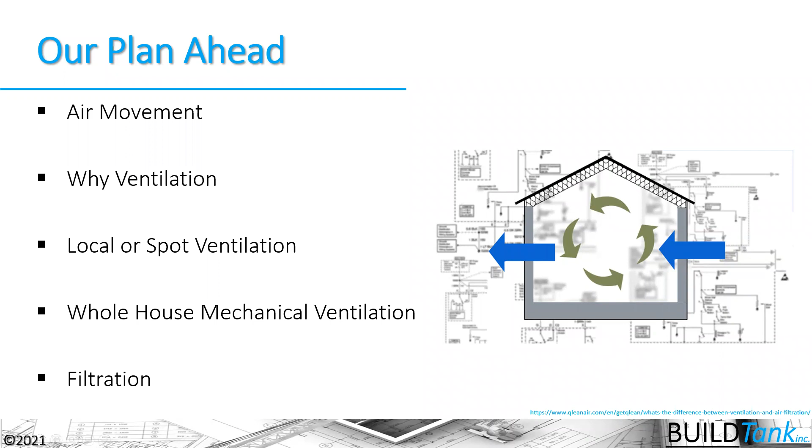So to begin, we have a poll question that we wanted to throw out there. It's a good question, a question that we get quite often in the field from builders, trade partners, code officials, owners of housing. All kinds of folks ask this question.

We'll get in a couple answers. I'll go ahead and stop it in 5 seconds. Okay.

Okay, so we still have some people out there, about 37% or so, that are saying yes, that we can build houses too tight. And we must have reached out to the 63% who are saying no, because the answer to the question really is no.

The reality is that we're asking the wrong question. What we're trying to do is get control of airflow in our houses. And in order to get control in our houses, we need to build our houses tight. We'll come back to that air control in a minute, but really in order to get that air control, we're building our houses tight. We need to think then, what is the real question that we're asking there? And that real question is, can our houses be underventilated? And the answer to that is a resounding yes.

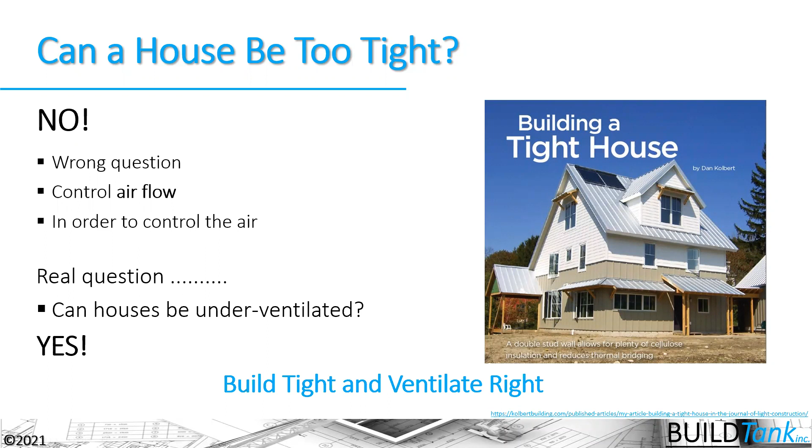Our houses can be underventilated. And in most cases, they are underventilated because we're not spending enough time on that question, on how do we ventilate our houses? How do we comply with what the code is asking us to do? And what the code is asking us to do now is to build our houses tight and to ventilate them correctly per the code.

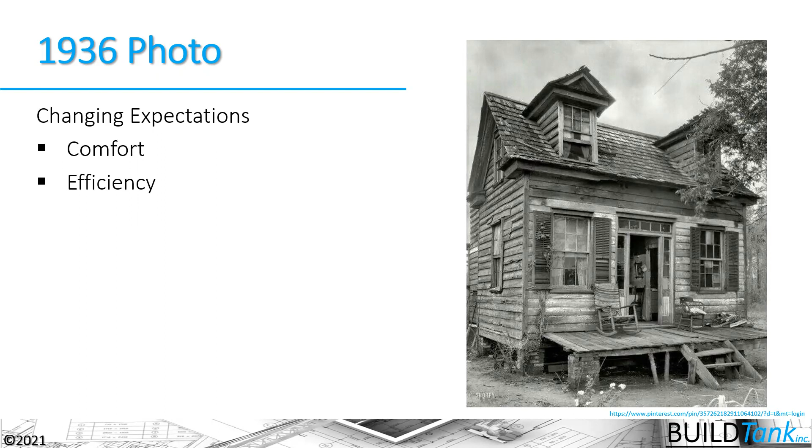So efficiency expectations have changed pretty dramatically, and we've added thermal insulation to our houses, which really only began in the late 1960s. We want our houses to be safe and healthy, and we want the indoor air quality to be good in those houses. We want our houses to be durable.

So all of these things are leading us to build our houses as tight as we possibly can and to ventilate them correctly. We need to build them tight to gain comfort, efficiency, and safety and long-term durability, and ventilate them correctly from a durability perspective, from a safety perspective, and health and indoor air quality perspective as well.

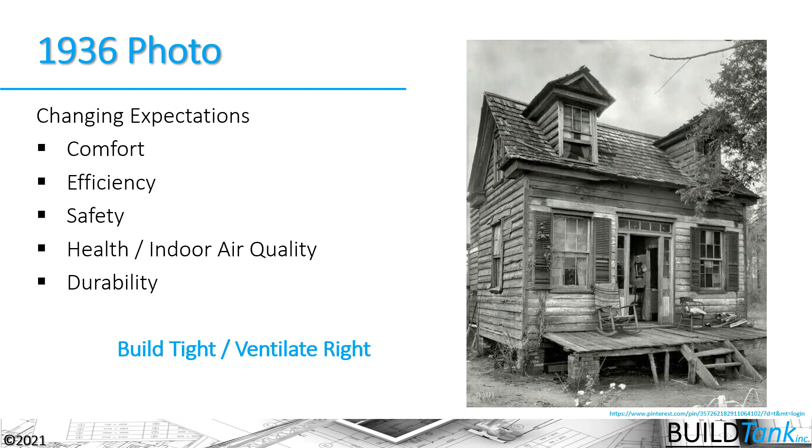As we gain control and predictability of the airflow, the moisture flow, and the thermal flow in those houses, we have houses that will meet those core expectations of our houses, and have houses that will last and be durable over time. But when we're talking about building tight and ventilating right, we're talking about primarily the airflow portion and also the moisture portion. So we need to do a quick review.

And if you were with us last week, this will be a very quick review. That's to talk about how air flows in our houses. We need to think about air as a transport mechanism. Air is transporting heat, moisture, and pollutants around our houses, just like this freight train is transporting coal.

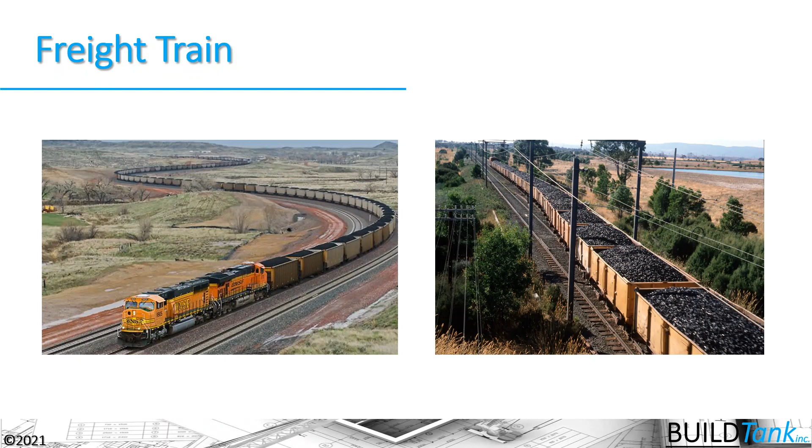Now we know that this freight train is taking coal from point A to point B, maybe from the mining pit to the coal plant or the power plant. And the issue with air is that we don't always know where it's going to take its load that it's transporting. Ideally, it's taking it from inside to outside our houses, or potentially from outside to inside our houses. But sometimes that load gets deposited inside of a wall assembly or a roof assembly, and that heat and moisture and pollutants can create repeated wetting and condensation in our buildings.

So from an airflow perspective, we know that any air that moves into our house needs to move out of our house. We define our houses by this thermal envelope, the alignment between the insulation and the air barrier system all the way around our house, that creates this boundary condition that separates conditioned space from unconditioned space. And so that boundary condition traps a specific volume of air.

And when a cubic foot of air enters our house, that means that a cubic foot of air has to leave our house, and vice versa. If a cubic foot of air leaves our house, then a cubic foot of air has to go into the house. And we can equate a cubic foot of air from a size perspective to try to imagine that it's about 4 basketballs equals about 1 cubic foot of air there. So a cubic foot of air enters and a cubic foot of air leaves.

We need to have a hole for that air to move through, and we need some type of pressure difference across that hole for that air to move.

From a ventilation perspective, we're getting air in and out of our houses to help maintain indoor air quality, but also to help maintain a proper moisture balance within our houses. Because as we build our houses tighter and gain that control and predictability, the moisture content of that air will naturally increase.

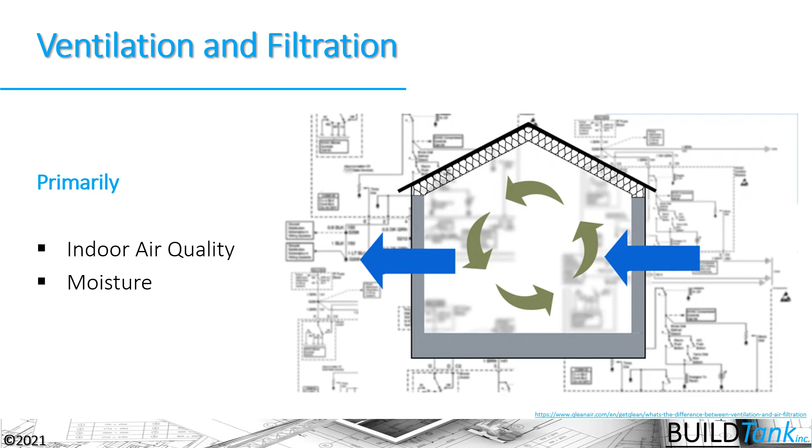We want to build tight again to create long-term durability, and it has to be married with that ventilation side. So that's why we get that mantra, build tight and ventilate right, because they're wedded together. They can't be separated.

From an indoor air quality perspective, ultimately, why is it an issue for us? Well, we know from this COVID era that we're currently living through, hopefully coming to an end from, that we spend a significant amount of time in our houses. Before COVID, we spent about 90% of our time indoors. During the COVID era, we're spending probably even more than that.

The Environmental Protection Agency is telling us that indoor air pollutants are 2 to 5 times greater indoors than outdoors. So we're trying to figure out how do we dilute those pollutants by bringing fresher air from outside into our houses and potentially filtering that air.

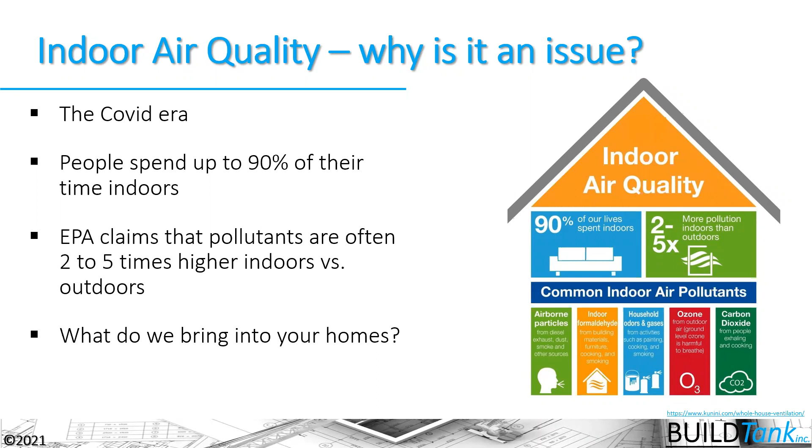We need to also think about what we bring into our homes, not only from an air perspective, but from the furniture, the cabinets, the cleaners that we bring into our house. These are things that off-gas, that create that new car smell, which actually is a sign of volatile organic compounds and other things that are not good for us.

Now, there's a doctor out there that tried to understand better how much time we actually spend indoors. He says our average lifespan is 79 years. Of that, 69 years we spend indoors, 54 years we spend at home, 26 years in bed, 4.3 years in our vehicles, and 6 years outside of that 79-year life.

So it's a significant amount of time to try to put it in perspective, how much time we actually spend indoors, breathing air that potentially isn't filtered, breathing air that's the transport mechanism for the pollutants that we might worry about from a health and safety perspective.

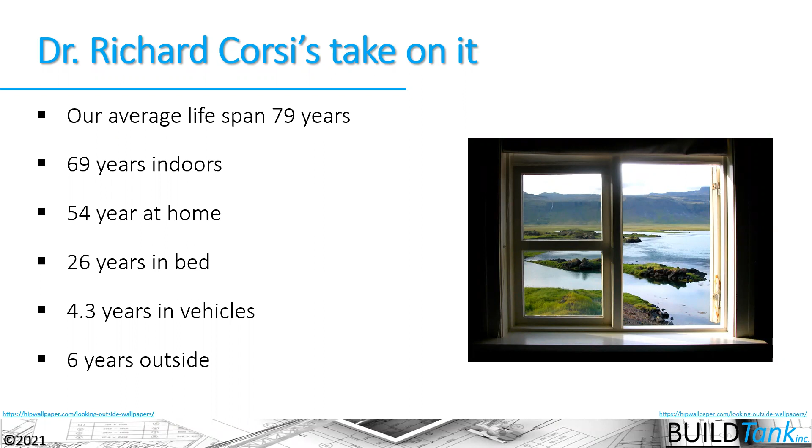Another way to think about why it matters is that air and the pollutants it carries can have some severe health effects for us. It can impact our emotions. It can have physical impacts, cognitive impacts, and can impact our respiratory breathing as well.

So this notion of filtration and ventilation is a real health and safety concern in our houses, because we need to build them tight to meet our efficiency goals and our long-term durability goals, and ultimately meet our comfort expectations and other expectations we have of our houses. But we also need to ensure that we take care of the health impacts of that.

So ultimately, what do we do? From this perspective, we need to think first about source control, bringing non-toxic materials and products into our houses. We need to think about radon and building a tight house, and how do we ensure that radon never enters our house, that we mitigate it before it enters by getting that proper radon system below the foundation, routing a pipe up to the peak of our roof, and using stack effect or passive radon ventilation to get it out, or potentially make it an active radon system with a fan as well.

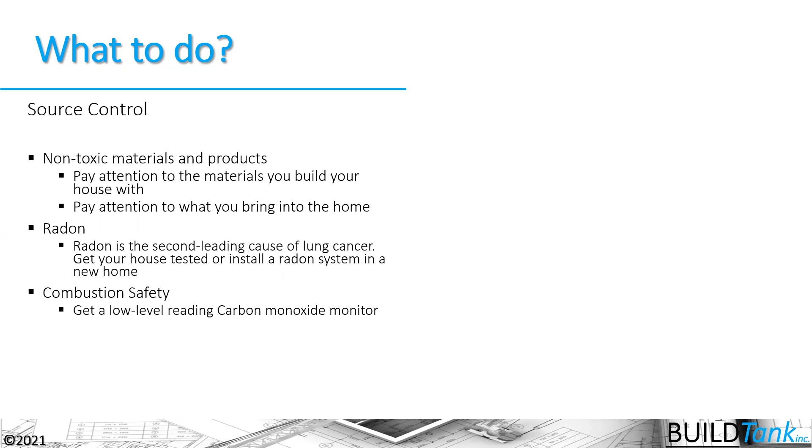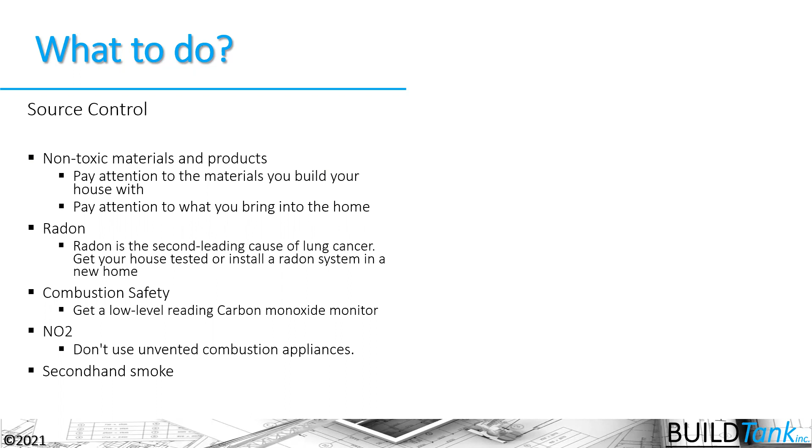Combustion safety is a huge issue because carbon monoxide is such a volatile gas that can ultimately kill us. We want to try to ensure that we're using as few atmospherically vented or non-sealed combustion appliances in our houses as possible. Nitrogen dioxide is another issue we need to think about, let alone smoking and other pollutants in our houses. So moisture control is another part of this.

Moisture destroys our houses. It can cause mold growth. It can cause things to get wet repeatedly from condensation.

That condensation ability is really the single thing that destroys houses over time - that repeated wetting of our structures, of our building assemblies. So moisture control is a big part of what ventilation is trying to do, is to maintain a moisture level in the houses that is adequate for the occupants, but won't ultimately destroy our houses over time.

Fresh air is a big thing we want to ensure. Controlled whole house mechanical ventilation is one way to introduce fresh air, and local and spot ventilation is one of those ways to ensure we can get the pollutants we put into that air up and out at the source at the time we're doing cooking, laundry, or our business in the bathrooms. We need to get that air up and out as soon as we can while doing those activities. That's what local and spot ventilation is all about.

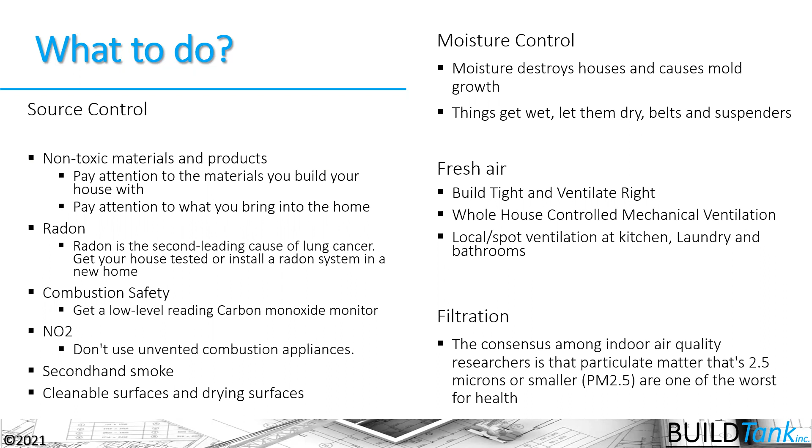Now we have this tremendous ability to filter air that's not only flowing within our houses, but flowing from outside to inside our houses to help ventilate it. We can get down to filtering very small particles, this PM2.5 size particle, out of the air. We can actually filter viruses out of the air as well now in our homes. So ventilation and filtration are super important, again, from this health and safety perspective.

Now, ventilation, again, we're trying to do it to help meet these modern expectations we have in our houses. When we're applying building science on our houses to gain control and predictability of heat flow, moisture flow, and air flow, we are coupling that with ventilation to help get that control. We're building tight to help get that control. We're ultimately trying to get fresh air for the occupants to increase the indoor air quality of our houses, and we're adding filtration to that. So ventilation refers to this exchange of indoor and outdoor air, and that's ultimately what building tight and ventilating right is all about.

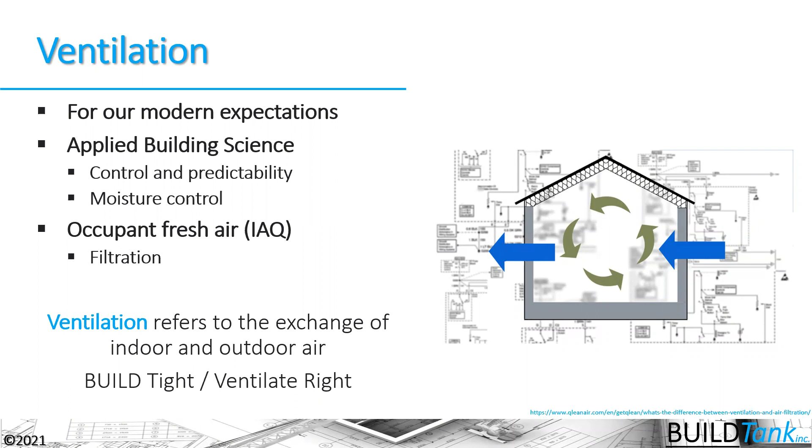Now, the next thing we need to talk about is moisture control and ensuring we have the proper moisture balance inside of our houses so we ultimately don't get mold growth. Now, mold is very common in our buildings - there's always some mold spore inside of our houses, and we need to understand what is needed for mold to grow.

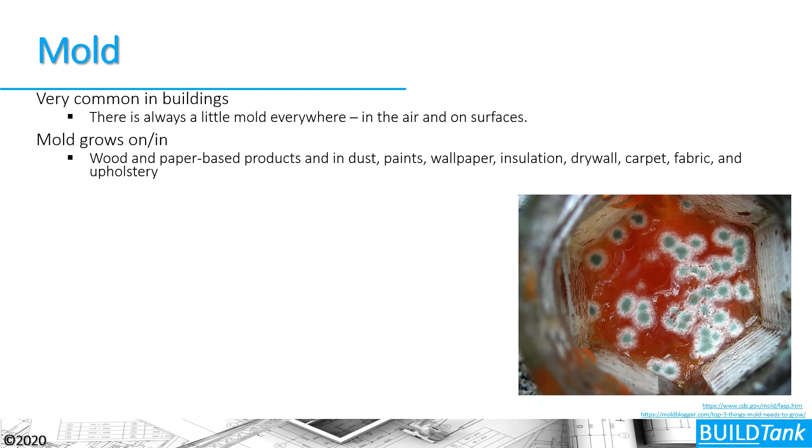One of the big things it needs is a food source, which is generally wood or paper-based products, dust, paint, wallpaper, insulation - all these things we build our houses for are means for mold to either feed on directly, or they trap other things in the air like dust and other pollutants that mold likes to eat. Mold ultimately needs a mold spore, the food or nutrients it feeds on, a specific moisture range for it to grow, and a temperature range - that's the 32 to 120 degree temperature range, and 60 to 90% relative humidity is ultimately what it needs.

So we can think about ways of controlling mold growth in our houses as well. If we can control the moisture content in that house, we can have better thermal control, air control, and we can promote drying potential over wetting potential. We can ensure that we're not going to get good mold growth in that house.

So we need to think a bit about where we're placing vapor retarders, how we're doing vapor control mapping in our assembly, so that we can ensure we have drying potential in at least one direction, if not both directions - which would be better yet - of these assemblies, because we know ultimately they're going to get wet. We need to let them dry.

Just going back to that 1936 house - why is that house so uncomfortable? Well, it has a lot of air moving through it, which means it has tremendous drying potential. And if we take a little care of it, it's going to last for a long time, meaning it's going to be durable. But when we layer on these other expectations onto that house, we change its drying potential dramatically. When we build it tighter so less energy is flowing through it, we're able to trap more energy to keep us warm in winter and cool in summer. We've changed the drying potential pretty dramatically in that house. So we need to think about those things when we build.

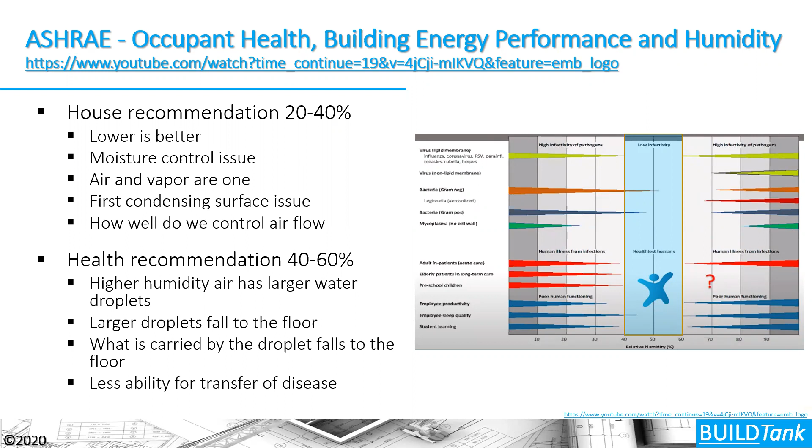Now, what's come up recently is this health recommendation that we have a 40 to 60% relative humidity, because the higher the humidity inside of our houses, the larger the water droplet, and the larger that water droplet is, ultimately it will be heavy and will migrate to the floor. So if that water droplet is in the air, and it's also carrying a virus, for example, then we have a means to get it out of the air. We have a healthier indoor air environment for us to breathe ultimately.

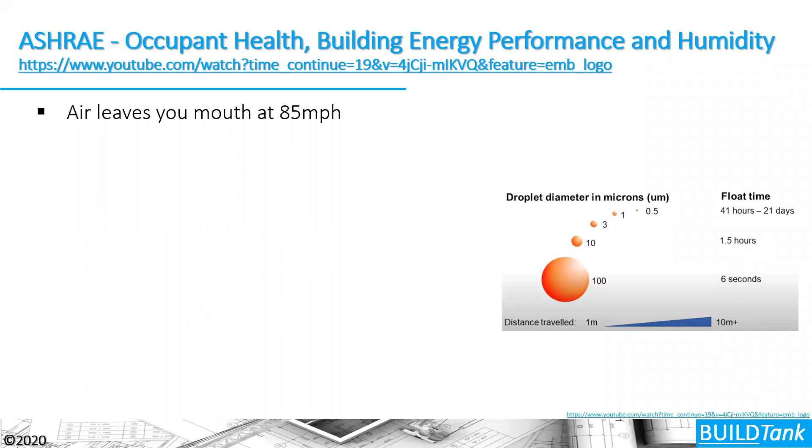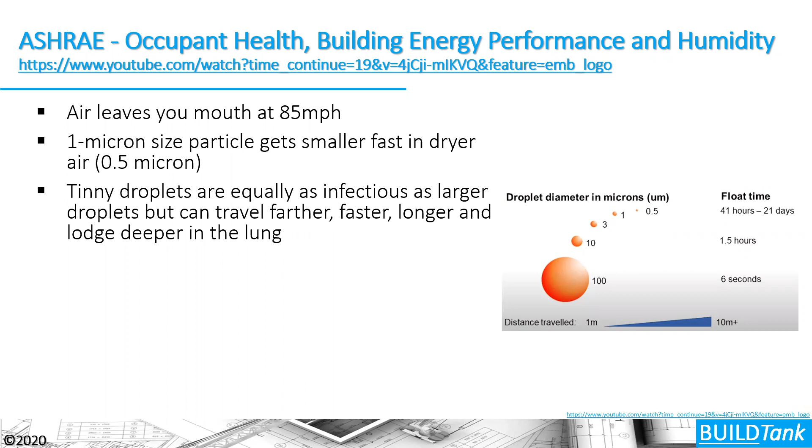So what we've learned over this COVID period is that air leaves our mouth at about 85 miles per hour. A micron is the size of the particle, and it gets smaller fast. That smaller, faster, drier particle moves further in a room than it did before. So tiny droplets are equally as infectious as these larger droplets in the air if we have a virus attached to that droplet, and they can travel farther and faster and longer, and they ultimately can lodge deeper into the lung.

So when we have a lower percent of relative humidity inside of our houses, the possible infection rate is actually higher. If our relative humidity is higher in our houses, our infection rate is actually lower. So the new recommendation is that we keep our houses between 40 to 60% relative humidity to reduce the potential for infection in our houses.

And so it's this interesting thing that we have this kind of little dichotomy between what's healthy for our buildings and what's healthy for our occupants. And we're trying to find that ideal range that's good for both. And that turns out to be in that 40 to 60% relative humidity range.

The main reason we're bringing this up is because ventilation impacts the relative humidity inside of our houses pretty dramatically. When we're building tight, it also impacts the relative humidity inside of our houses pretty dramatically. Just by building tight, the relative humidity is going to increase inside of our houses.

So we want to try to gain control of that relative humidity through ventilating our houses correctly, and potentially, depending on your climate zone, introducing dehumidification as well to keep that humidity in that ideal location between 40 and 60% relative humidity. So again, from a building's perspective, dryer's better, but from an occupant perspective, that ideal range is between 40 and 60% relative humidity. Okay, so, whoops, I went backwards.

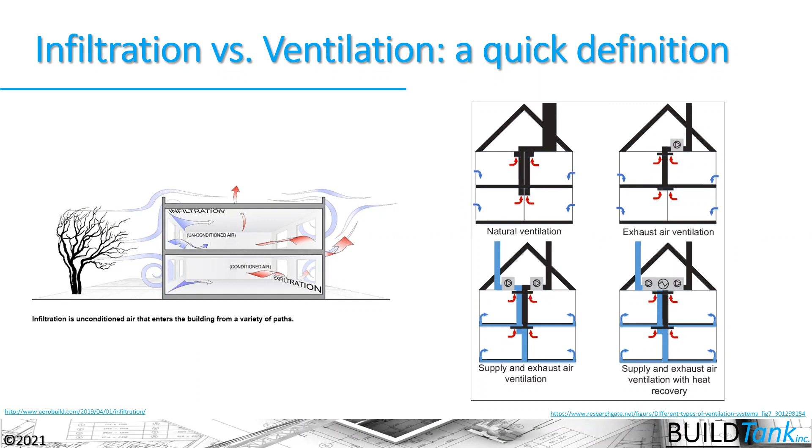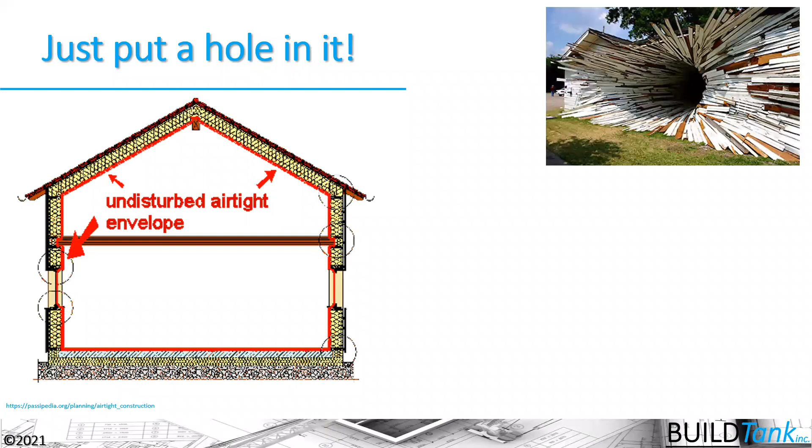When we're thinking about ventilating our houses, we need to think a little bit about the difference between what infiltration is and what ventilation is, because I get this question quite often. People say, you're asking me to build my house as tight as I possibly can, but then you're telling me to poke a hole in it and ventilate that house. So what I say is just poke a hole in it, because this is a systematic approach, and we need the house to be tight, but we also ultimately need that hole in the house in order to ventilate it and have control and predictability of what's moving through that hole.

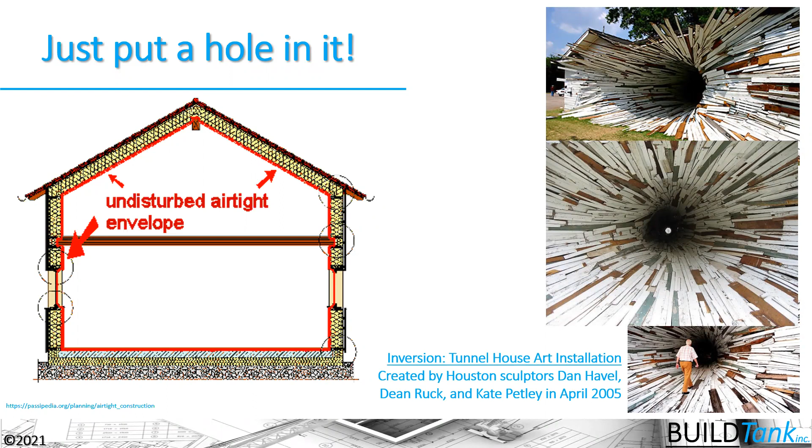So that brings us to this notion of what's the difference between infiltration and ventilation. When we're talking about air leakage in our houses, we're talking about infiltration and exfiltration. Infiltration is this unintended or accidental movement of air into the building, and exfiltration is just the opposite, air going out of our building. The big thing is that it's unintentional, accidental movement of air.

So we don't have any control or predictability of the air moving through that hole when we're talking about infiltration and exfiltration. And we know that it's a load we need to take into account when doing an HVAC design on our houses, because we need to make up for conditioned air that's flowing in and out of our houses through these air leakage holes.

Building tight helps us gain control and predictability of air moving through holes associated with infiltration and exfiltration. Now, from a ventilation perspective, ventilation is controlled and predictable air movement through holes in our building envelope. We set that flow of air at a specific rate, meaning we know exactly how many cubic feet of air, or how many basketballs, are leaving or entering the house. We set it at a specific schedule, so we know the house will exchange the flow of air every hour or every day, or how often that's going to happen.

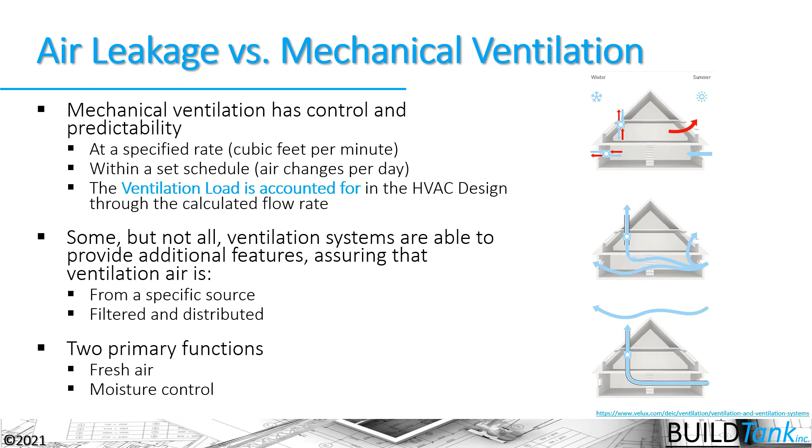Now, why from a code perspective do we need to ventilate our houses? Ventilating our houses happens from a code perspective because the code tells us that we shall provide ventilation in our houses. We'll see in a few minutes where that is triggered in the code, but this is the language - I believe this is in the energy code. It says the building shall be provided with ventilation that complies with the requirements of the IRC or the IMC. So what it's ultimately talking about is not only whole house controlled mechanical ventilation, but also spot or local ventilation.

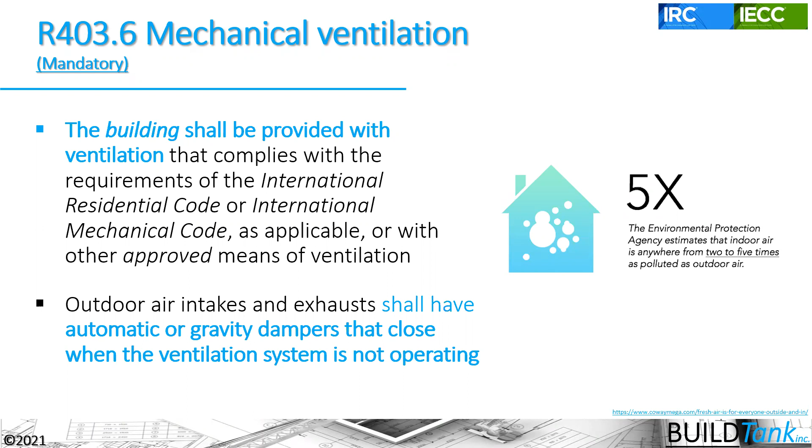So we're going to start with spot and local ventilation. This is ventilation happening in our kitchens, bathrooms, and laundries primarily. The primary purpose of spot ventilation is to get moisture and pollutants that we generate inside of our houses up and out at the point in time they're being generated, so that we're not overloading our houses with moisture and pollutants, and overloading the occupants.

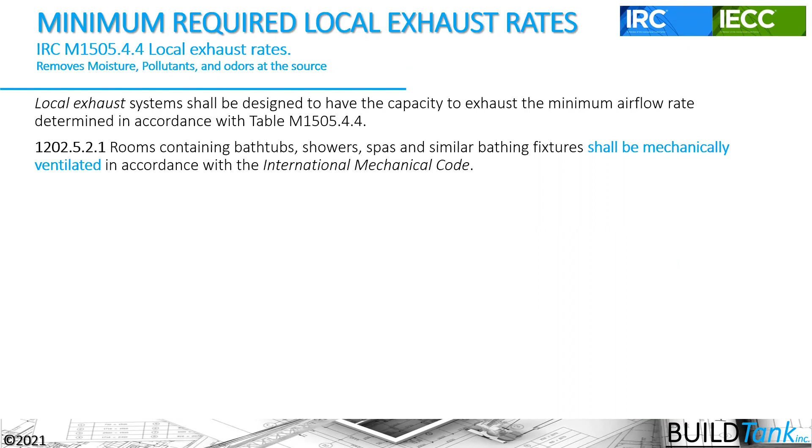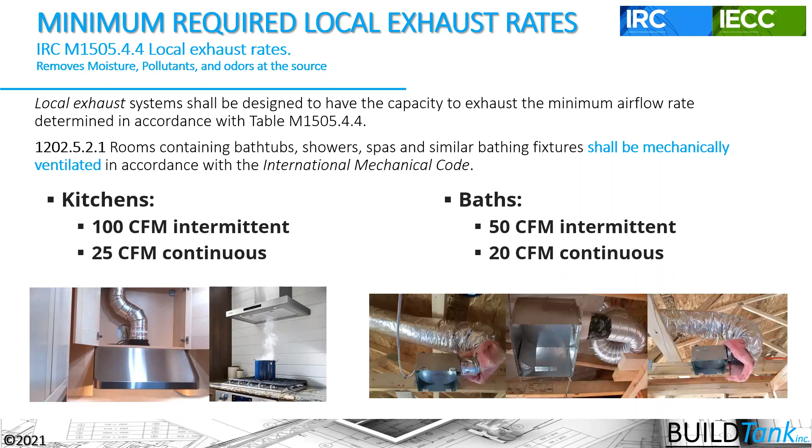So the minimum exhaust rates are defined in the mechanical section of the IRC, and it says that our kitchens need to exhaust either intermittently or continuously, at 100 CFM intermittently or 25 CFM continuously. And our bath fans that we use in laundries, bathrooms, and sometimes other locations also need to be able to push air intermittently or continuously - 50 CFM intermittently and 20 CFM continuously if we were to run it that way. It doesn't, however, go into the installation of these fans and specifically the ductwork to ensure we're getting that flow of air required by the code.

So you can see the pictures here and the duct installations. We are almost certain, just looking at a duct installed in these ways, that it's not going to be able to push the required amount that code is asking us to push in our houses.

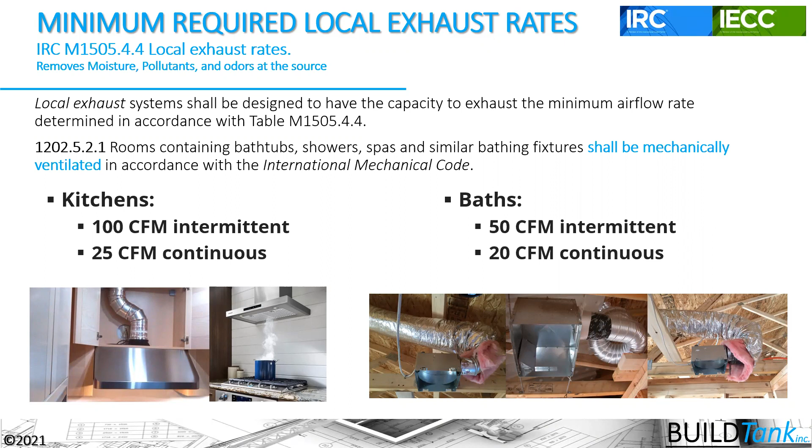Now we can move away from gas cooking to electric resistance cooking, and we can reduce a lot of the pollutants, but we still get these ultra fine particles that are produced just from the cooking process. These ultra fine particles are sometimes formaldehydes, these PM 2.5 size particles. There's other particles as well.

So there is a move to induction cooktops, and induction cooktops are a specific means of electric cooking that reduce the pollutants even more from the act of cooking itself.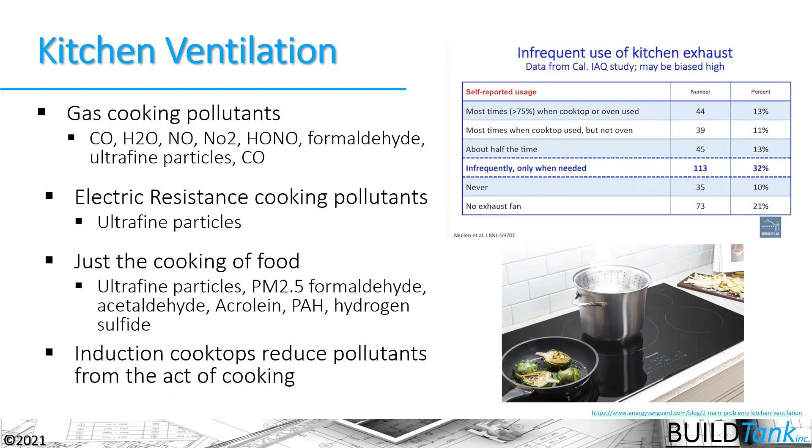We also are spending more and more time looking at kitchen exhaust hoods and their ability to actually move air from inside to outside, and not just any air, that air coming directly off of the cooktops. So we're starting to see that there's a new way of rating the kitchen hood, called capture efficiency, which is trying to get us a consistent standard for how high off the cooktop that hood needs to be, and also how much the hood covers that cooktop, and its ability to actually ventilate or move air up and out of the house at the time of cooking. So there's some interesting things happening from a kitchen exhaust hood perspective.

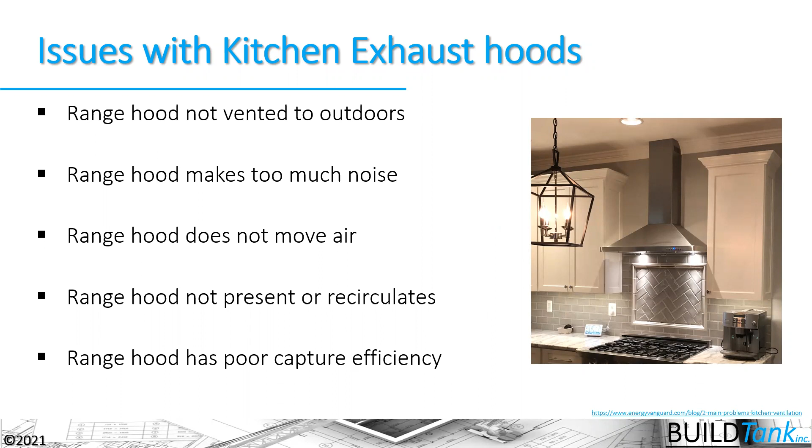Okay, so this takes us to our next poll question. This poll question asks, can you install a recirculating cooking hood, ventilation hood, in our houses, in our new IECC 2021 houses? We'll give it another 5 seconds.

Okay. You look pretty even here. Okay, so almost a 50-50 split, just slightly more that say yes than no.

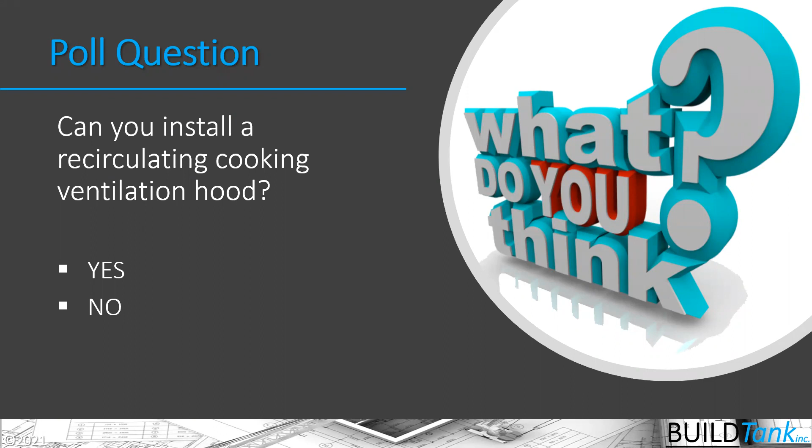I probably should have put maybe, or it depends, as well on the answer sheet there. But what we know is that the mechanical code says that everything needs to be discharged to the outdoors. It says ducts serving domestic cooking exhaust equipment shall not terminate in an attic or crawl space or areas inside the building. However, there is this exception: it says where installed in accordance with manufacturer's instructions, basically you don't need to do that. This is the large loophole. In essence, everything that is exhausting air is supposed to be exhausted directly to the outdoors, which would imply that you can't recirculate the air inside a house over a cooktop.

However, this exception provides a loophole because obviously the installation instructions for a recirculating hood tell you that you don't need to put in a duct from the inside to the outside for that installation. However, there is another section of code that I didn't include in the presentation that says the most restrictive portion of code shall govern when there is a conflict in the code. So from my perspective, I believe that kitchen hoods that recirculate should not be allowed to be installed into a house, but ultimately that is a question that jurisdictions need to address and think about.

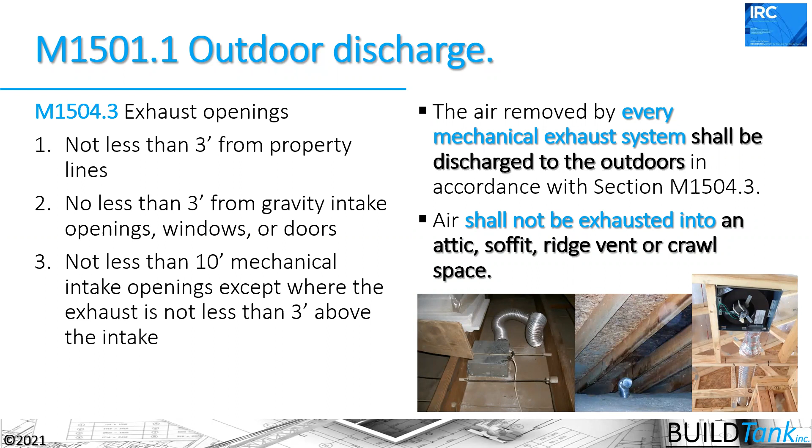What we know is outdoor discharge: that air removed by every mechanical exhaust system shall discharge to the outdoors is listed in the code, and shall not exhaust into sections that are either buffer spaces or directly inside the conditioned envelope. Exhaust openings are also defined in the house. This 3-foot, 10-foot rule that some people know about is something that we want to ensure, primarily so that we get that exhaust air up and out of the house, and we ensure that it's not next to an opening that might bring air back into the home from a ventilation perspective.

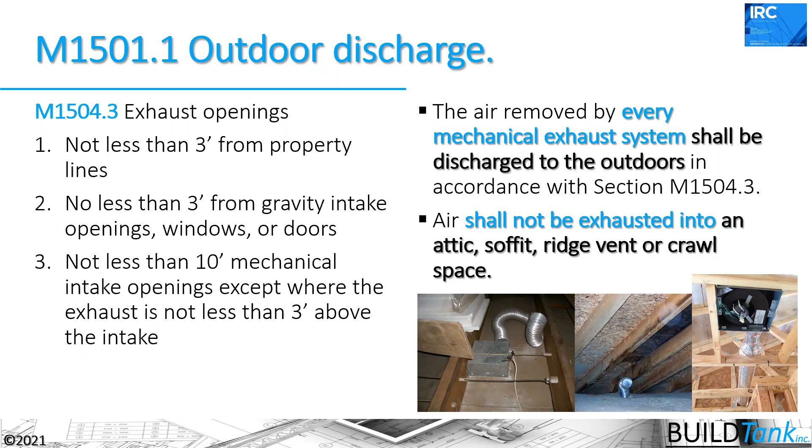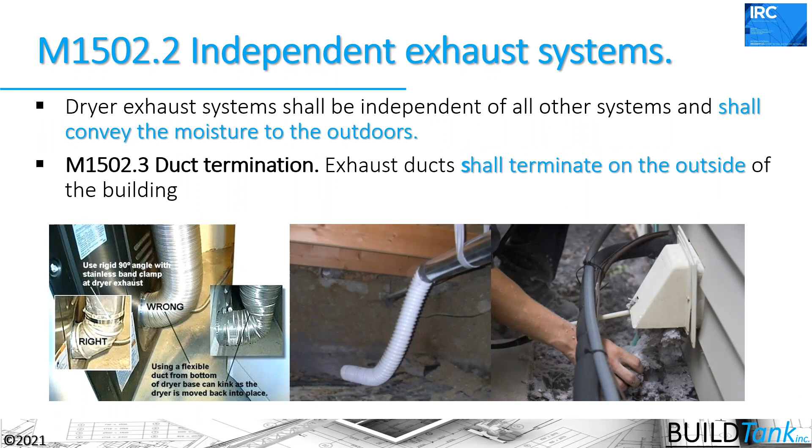We also know that the code says independent exhaust systems need to convey that moisture to the outdoors. So these are talking primarily about dryers and other things like that, and it deals with the installation of the ducting for exhaust systems as well as the ducting for HVAC systems that are delivering and returning air to a furnace cabinet, for example.

These exhaust systems, the joints shall be sealed and they shall be mechanically fastened. So duct tape is generally not what we like to see. The foil tapes are a little bit better, but mastic is the best sealing mechanism, so that when moist, warm air is flowing through this duct from the inside to the outside, it's not leaking out into our building assemblies or into attics and creating condensation on the roof deck.

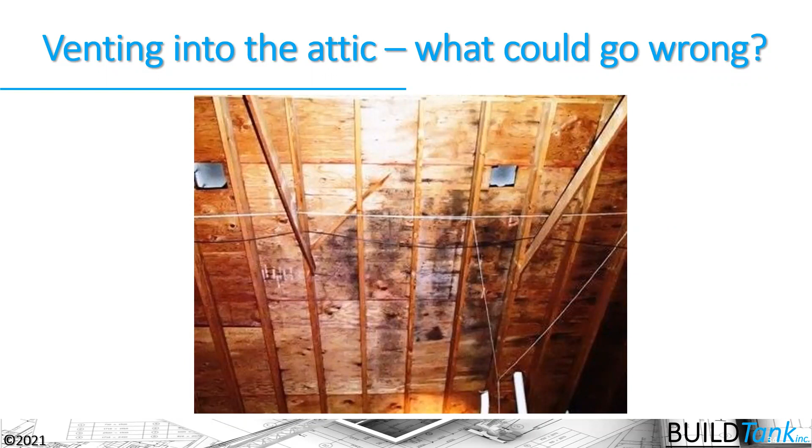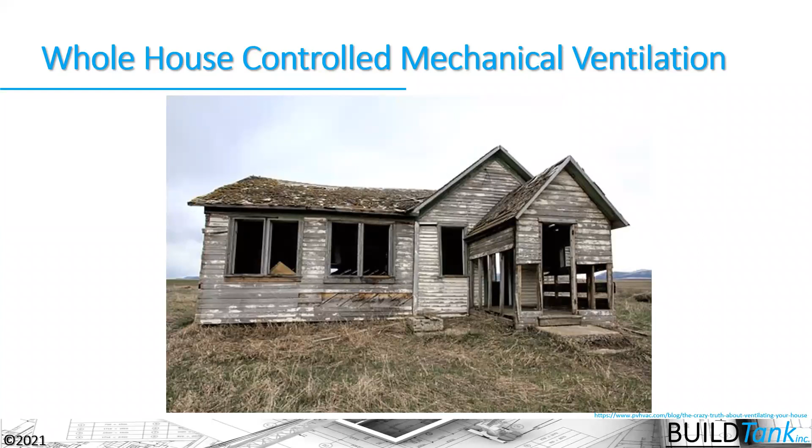From a whole house control mechanical ventilation perspective, we're not building leaky homes anymore because we're dealing with efficiency, comfort, and long-term durability of our houses. We need to build them tight.

So we need to ventilate them with whole house controlled mechanical ventilation. The code has a trigger: how tight does the house need to be before we introduce ventilation? Basically, if our house is at 5 air changes or tighter, then we need to provide whole house mechanical ventilation in accordance with the mechanical code section 1505.4.

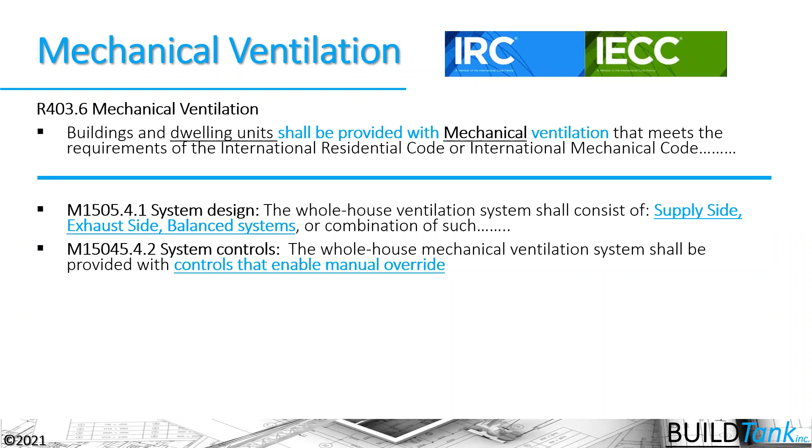As system design is telling us, we can use a supply side, an exhaust side, or a balanced ventilation system in our houses, and we need to be able to control and have manual override of those systems. What it should also say is that we should be required to educate the occupant about these systems and why they shouldn't turn them off, but it doesn't go that far, unfortunately.

It also says that we have to run these systems continuously, although there is an exception where you're permitted to run them intermittently if you increase the flow rate. For example, if my continuous flow rate was 100 CFM running 100% of the time, and I decided to run it 50% of the time, then I would need to increase the flow rate to 200 CFM of air.

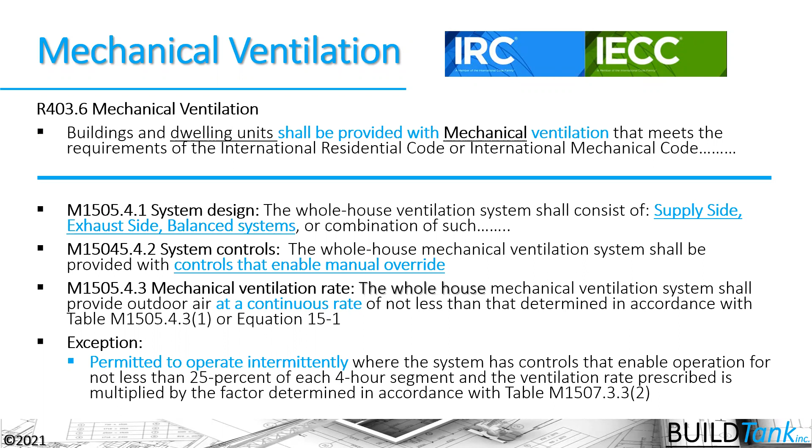Now, just a quick review of the ventilation strategies. We're allowed to positively ventilate our houses, we're allowed to negatively ventilate it - that's the supply side and the exhaust side ventilation. We're allowed to have equal pressure systems or balanced ventilation systems.

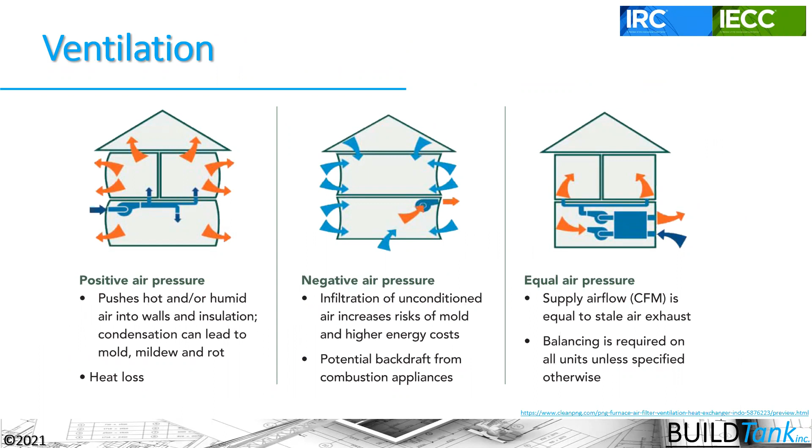Now, the ventilation rate uses the ASHRAE 62.2 ventilation rate in code. It says that you can determine your ventilation rate using this table. So in this case, I have a 4 or 5 bedroom house that's 1,500 to 3,000 square feet. I need to continuously ventilate the house at 75 CFM of air flowing through that house continuously.

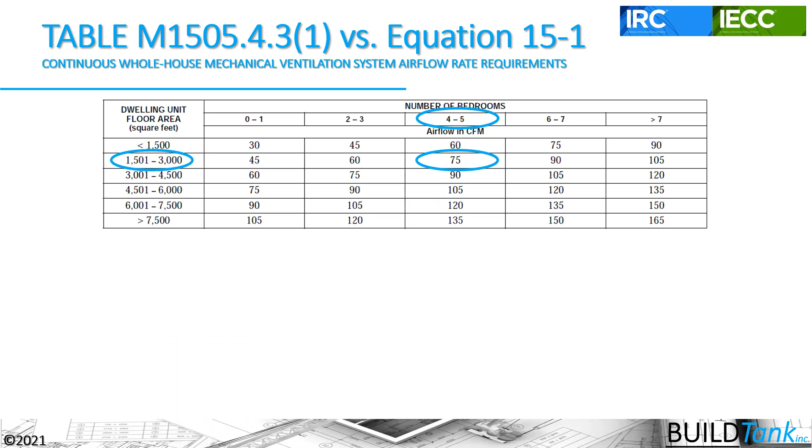The code also says that I can use this formula, and we're finding that most folks are using the formula because it's a bit more accurate. We also want to ensure that we're not over-ventilating our houses as well.

So if I have the smaller house in this equation here, still 4 bedrooms, it's telling me that I need to use 52 CFM of air rather than the 75 CFM of air that the table is telling us to use.

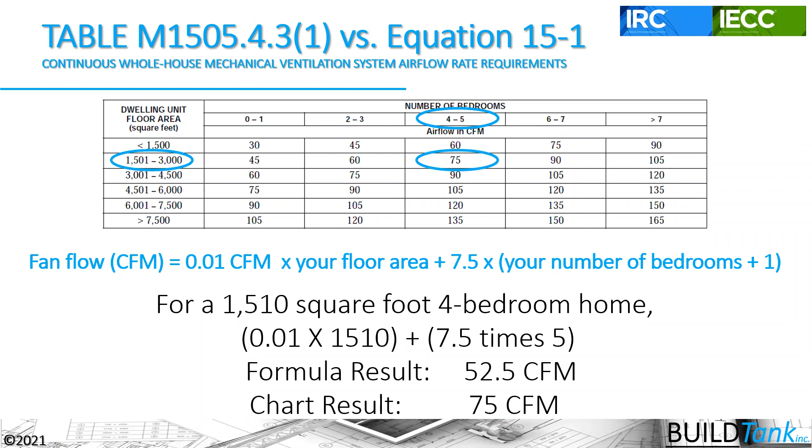So once we know our ventilation rate, we know that we can use supply, exhaust, or balanced ventilation systems. We need to decide which ventilation system we're going to use in our houses. It turns out that the ventilation system is really climate specific, and we need to choose the right one for our particular climate.

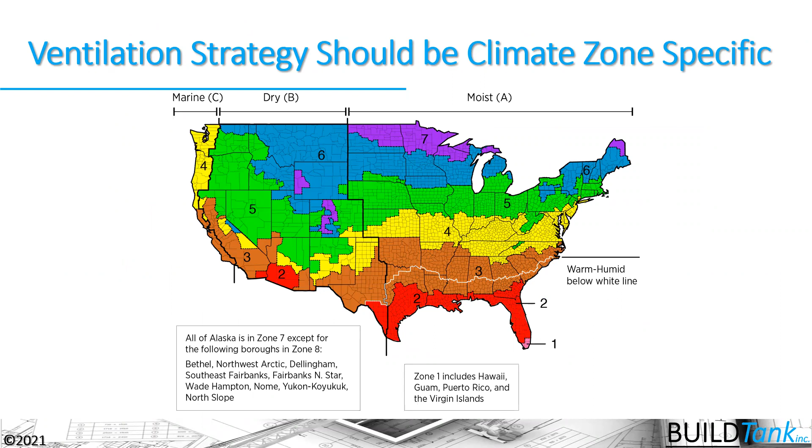So a supply ventilation system is a system that pressurizes our houses. We're taking air from the outside to the inside of our house. It can be a dedicated supply fan, installed in the mechanical space, or run through our mechanical system in the houses. What we know is that it's creating a positive pressure inside of our houses.

So from a climate perspective, we need to think about where we have more moisture inside of our houses in relationship to outside our houses. A supply ventilation system that's pressurizing our houses means that air is potentially being pushed from inside of our house to outside of our house through holes in our building envelope.

Now, we might reduce the possibility of backdrafting atmospherically vented appliances in our houses, but we need to think about where the moisture load is. Am I pushing more moisture through those holes in the building envelope? This strategy is often used in moist, humid climates like the Southeast in the United States, because the moisture level is higher outside the house than it is inside the house, since we often do dehumidification inside the house.

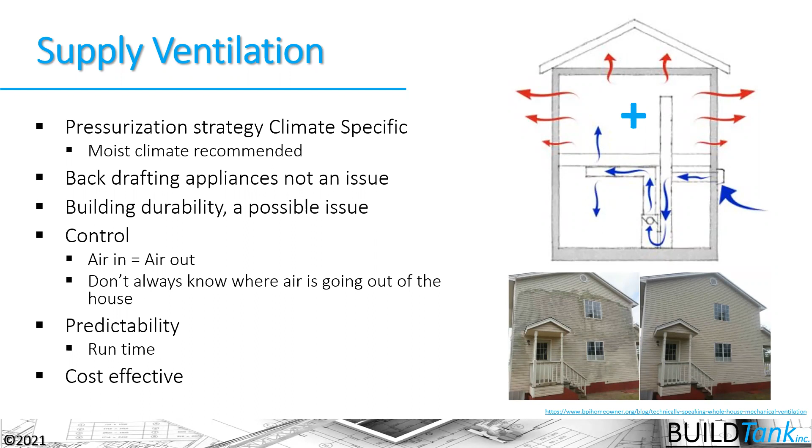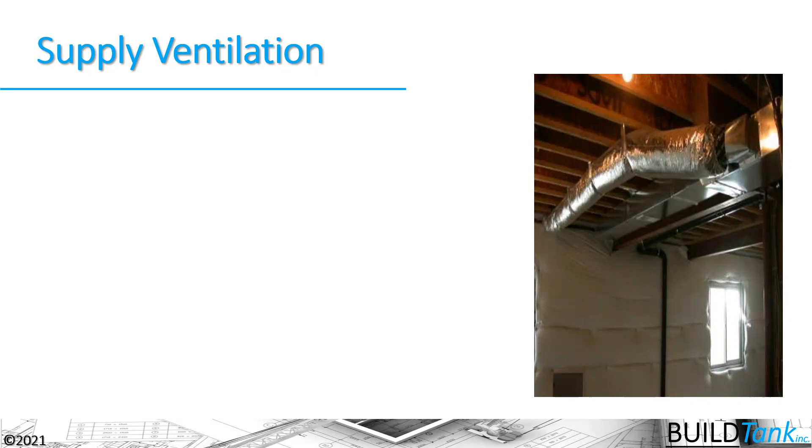You can also use inline supply fans connected to that ductwork. You could bring in air from the outside to the return side of the furnace that way as well. So these are other ways that supply side ventilation is being used.

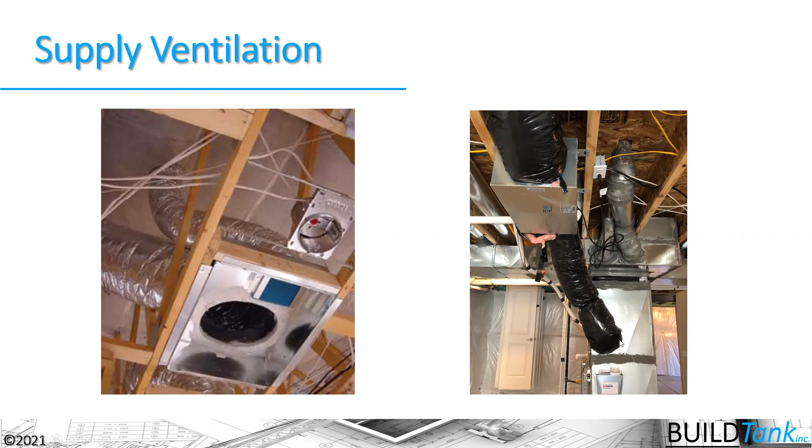In this case, we have a duct from the outside to the return side of the furnace, and air is coming from outside, looping into the return, back to the furnace, and then delivered to the house. Now, the problem we'll see with this system is where it's taking the air from. In this case, it's taking it from the roof deck. Hopefully it's not an asphalt composite shingle creating a lot of pollutant and off-gassing that you might be bringing into the house. Here's an inline fan that's bringing air from outside to inside the house.

Okay, so to our next poll question: Does the IECC require mechanical ventilation to be tested?

Before we go on to the other two ventilation styles or frameworks we are allowed to use, we wanted to answer this question and potentially show you, regardless of the answer, how you can test the flow of air so you can really gain that control and predictability.

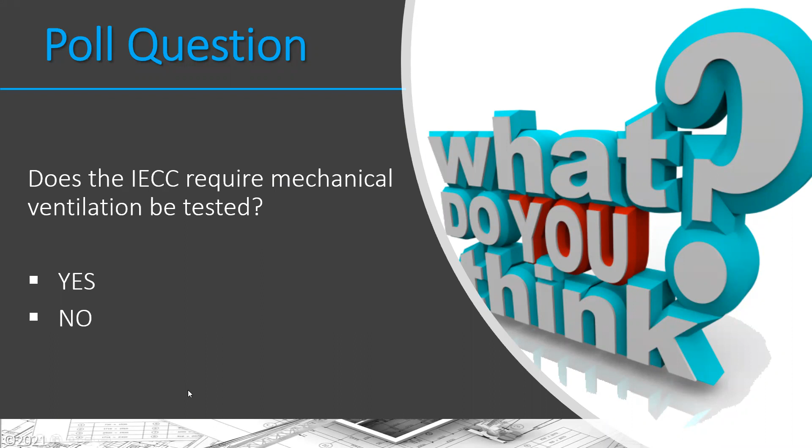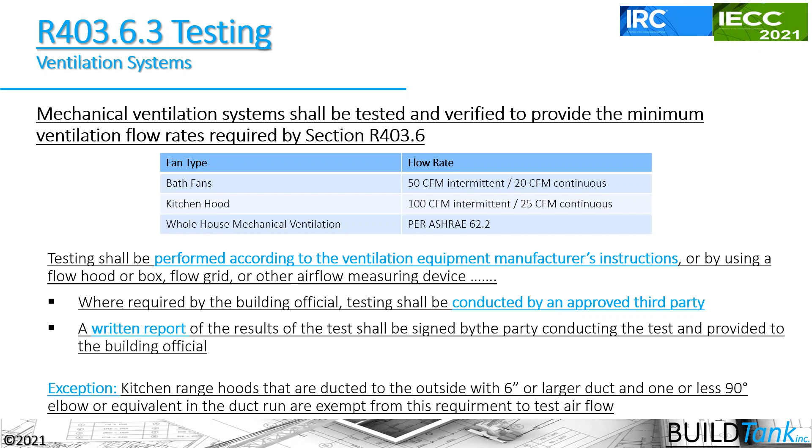So it looks like most, 73% of people are saying yes, it is a requirement. And that's true now in the 2021 IECC. It is a requirement that you actually test the ventilation and prove that it's meeting that minimum 50 CFM, or 100 CFM for kitchen hoods, per ASHRAE 62.2 and per the requirements listed in the IRC as well. There is an exception for kitchen hoods, but I'll let you guys look at that later.

When you're talking about supply side ventilation, it's not easy to measure. We're hopeful that more and more folks using supply side ventilation might put in a damper like this. This is called an iris damper. This iris damper has the ability to put a pressure gauge on it and measure the flow of air through the damper. It also gives you the ability to change the opening size so you can change the flow rate through the damper.

In conjunction with an inline fan, or with a furnace fan blower bringing air into the house, this type of system can do a great job in quantifying the airflow through the system. So there are other ways. Sometimes those inline fans have pressure ports on them that you can use for measurements. There are some other ways to measure as well, but I just wanted to give you an idea of the importance of measuring that flow.

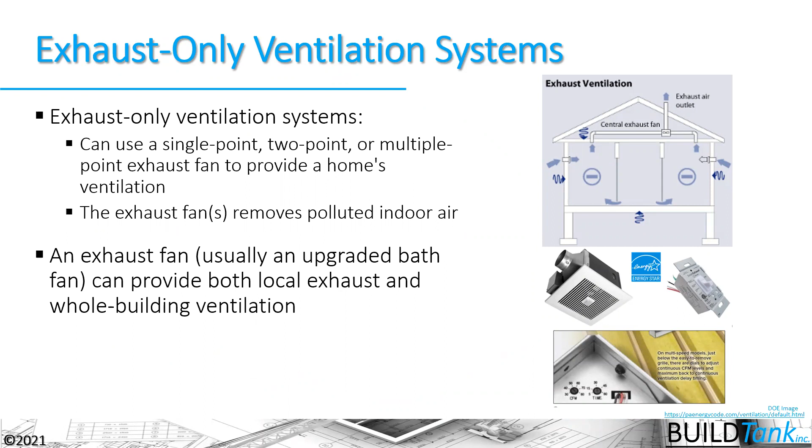Moving on to exhaust ventilation systems. Exhaust ventilation systems use a single point fan, sometimes a multi-point fan, to exhaust air up and out of the house. Again, it creates a negative pressure inside the house. Therefore, you're bringing air from the outside through the building envelope to the inside of the house. And therefore, it's used primarily in drier climates, because it's drier outside than it is inside in a drier climate, and you want to bring that drier air into the house.

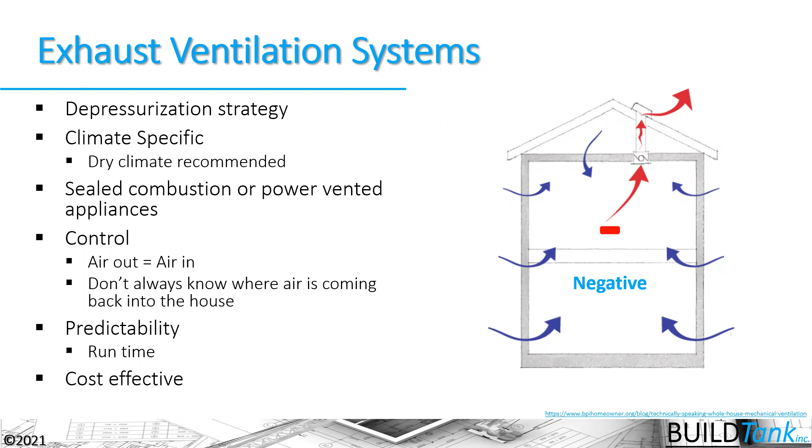So again, from a climate perspective, exhaust ventilation is generally used in drier climates and supply ventilation generally used in moist climates. Again, we're able to get that control and predictability because we're using a fan to know the rate of air moving out in cubic feet per minute, and we've got it at some type of runtime, either continuously or periodically, so we know exactly how often it's run. Exhaust systems can be set up with a known opening to the outside, so you can reduce the potential of air coming through random holes in the building envelope.

So if you have a fan that's exhausting air to the outside, air is going to come back in at the same rate. Air out equals air in. And if you put a known opening to the outside, air is going to take the path of least resistance.

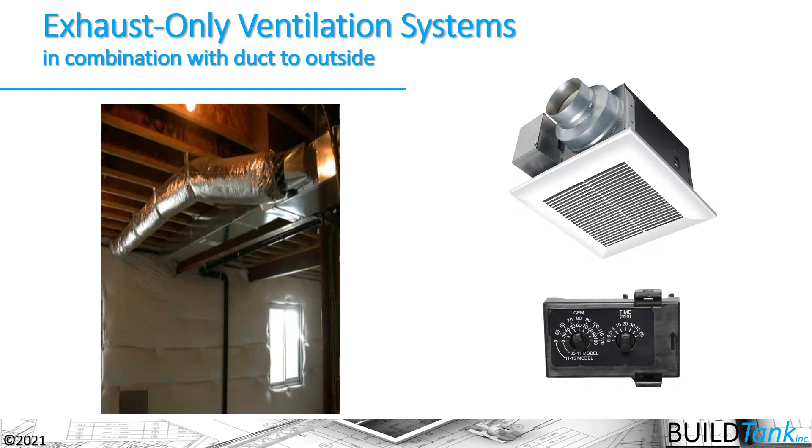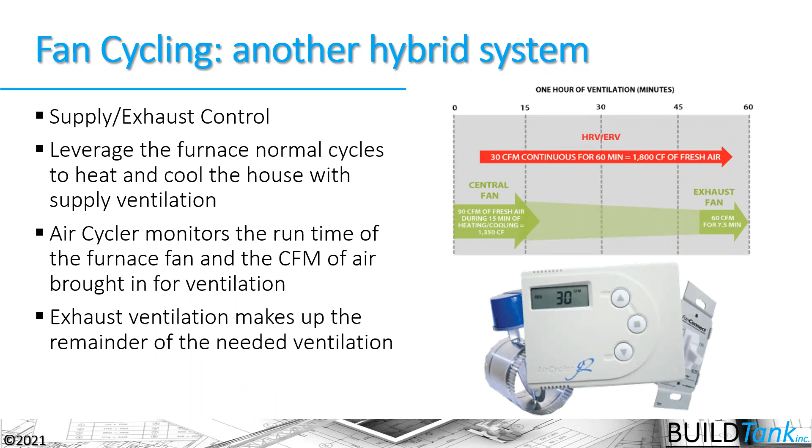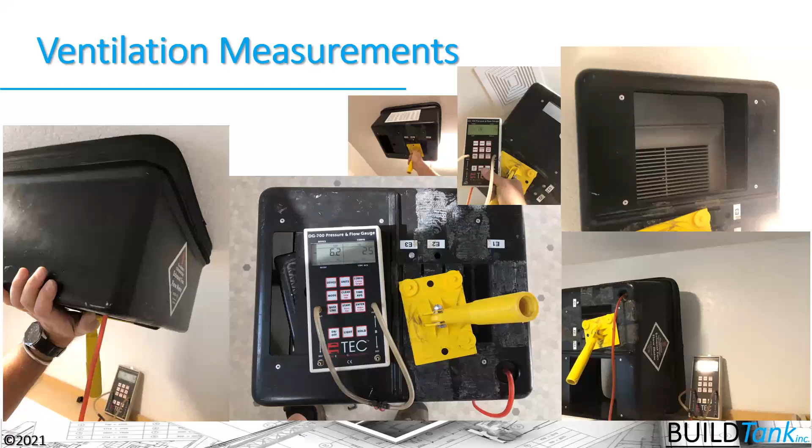Again, there are a variety of different approaches: strictly supply, strictly exhaust, or a combination of the two. When you're talking about exhaust ventilation, most often you test it using a flow box to measure the flow going out through the exhaust fan. You can set control dials on these higher quality fans to set the CFM rate and the time rate to get that control and predictability of the air flowing through the fan.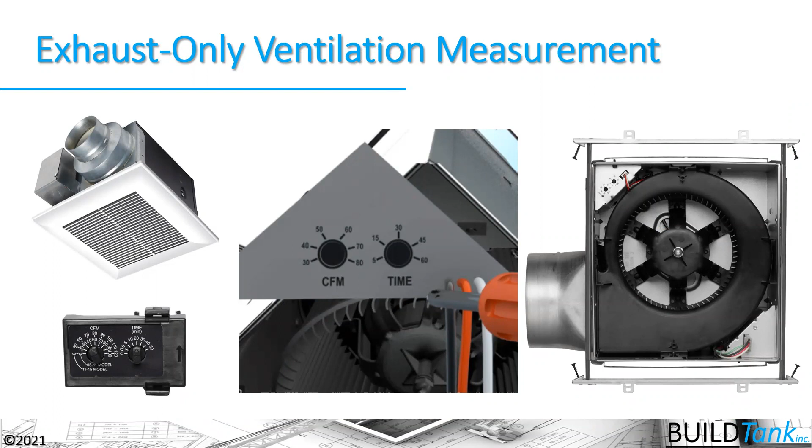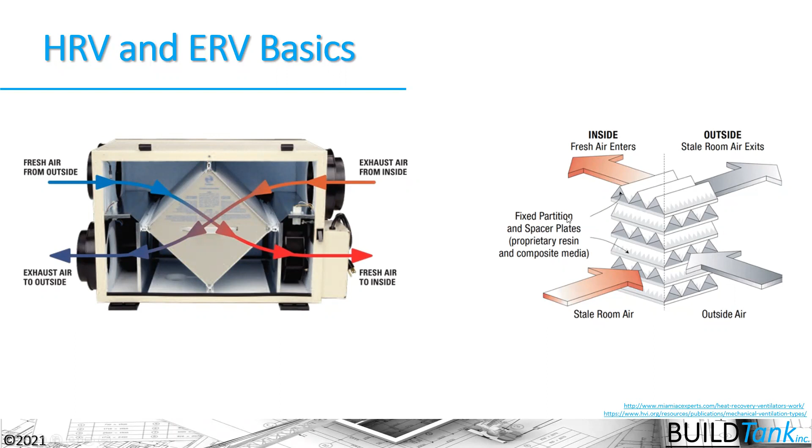Now, balanced ventilation is when we get this neutral pressure. It's a safer system, bringing air in and out of our houses through a device like this, across a core where the air streams going in and out pass through, but don't physically touch each other. Moisture and heat can still pass from one airstream to another, so it's a great way to do that.

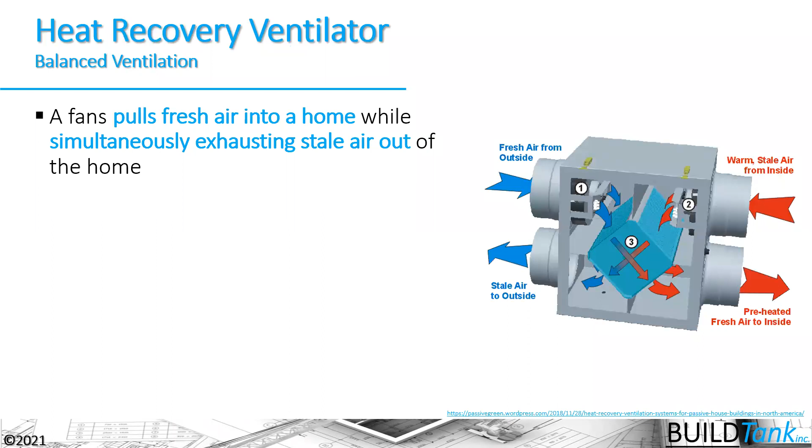We can recover energy with heat recovery ventilators that pull fresh air into the home while simultaneously exhausting stale air out, recovering some of the heat. They're generally 70 to 85% efficient depending on the model. Again, these fresh air streams generally don't touch each other physically, but they're able to transfer heat and moisture from one airstream to another.

When we install these systems, you generally want to deliver fresh air to the living spaces and take stale air away from moist areas like kitchens, bathrooms, and laundries.

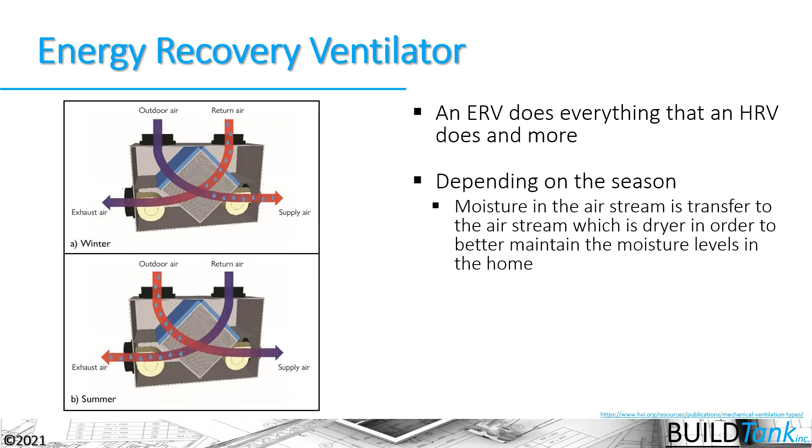Now, energy recovery ventilators basically do the same thing as heat recovery ventilators, but they're dealing with the latent load as well as the sensible load, meaning they transfer moisture as well as heat. We used to think these units really only worked and should be installed in moist climate zones. It turns out they work pretty well in drier, colder climate zones as well.

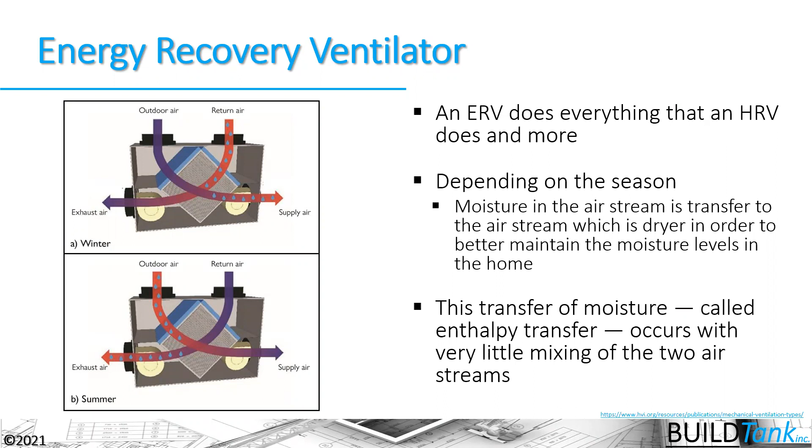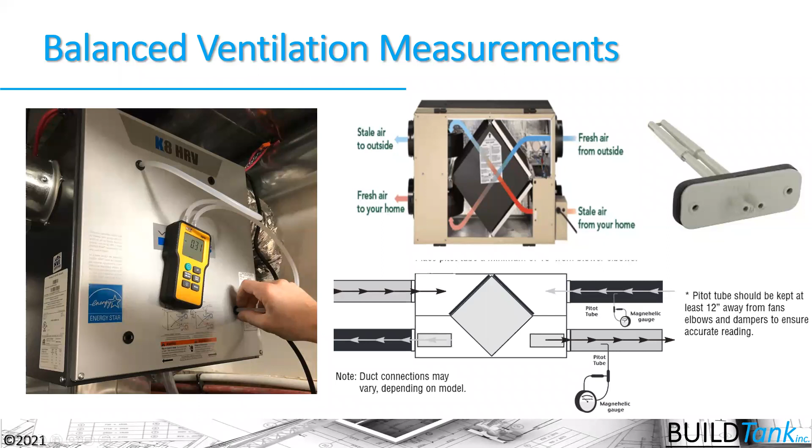They do need to be balanced. That means you need to test the ventilation flow rate going in and out of the house so you can balance the systems and ensure that neutral pressure. You can do that either with ports on the system and measurements there, or by inserting pitot tubes into the ducts and measuring the flow rate that way.

As we said before, you have to have control on this—the ability for these systems to be overridden by the occupants, which ultimately is a really bad idea. So one thing I like to say is the control has to be there, but it doesn't have to be an easily accessible control. And if you do put a control on, it's very important to label that control. Those two things aren't clearly defined in the code itself, but they're important things to remember.

Then the last thing with regards to control: because occupants have the ability to override it, you want to ask why they're overriding it. Most of the time it's because, first, they don't understand the notion of control and predictability and why we need ventilation in our houses. And second, because they think the system is noisy. If the system is noisy, nine times out of ten, it's because the system hasn't been installed well.

They should not be noisy systems in our houses. I have to leave it at that because of time constraints. I wanted to point out quickly that it's very important to locate the duct bringing air from outside in a location that's bringing the freshest air into the house, so ensure that you're doing that.

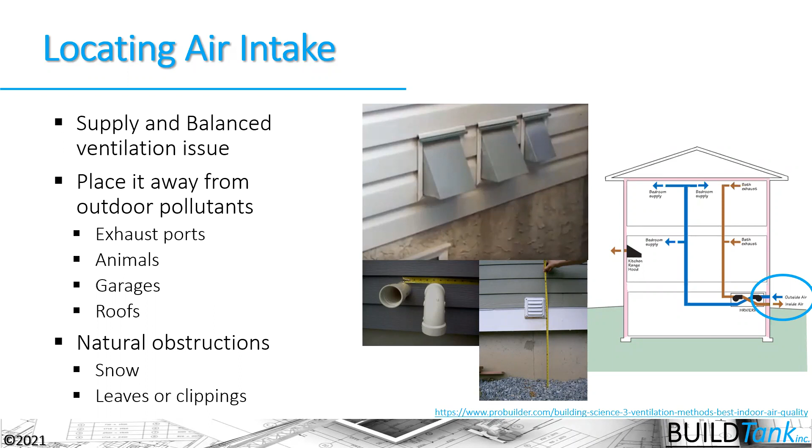And then we're going to end today on filtration. Filtration is not addressed in the code itself, but it's very important to include in that discussion when we're talking about ventilation.

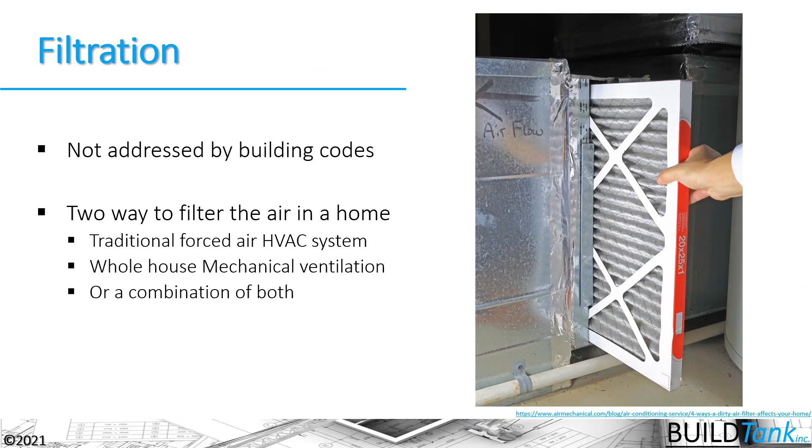So our last poll question that we're going to do quickly here is, what does MERV mean? What does it stand for?

Okay, so 66% said minimum efficiency rating value. Great job, that's what it stands for. The higher the number, the more efficient the filter is, but the higher the number, the more potential resistance to airflow as well.

So when you're designing your HVAC system, especially the duct portion, when you're doing your Manual D, you want to take into account the need—especially identified for us during the COVID era—of using a higher quality filter, understanding that you might have more static pressure drop across that filter, and therefore you want to use a better filter there. The higher the number, the more effective it is at cleaning air.

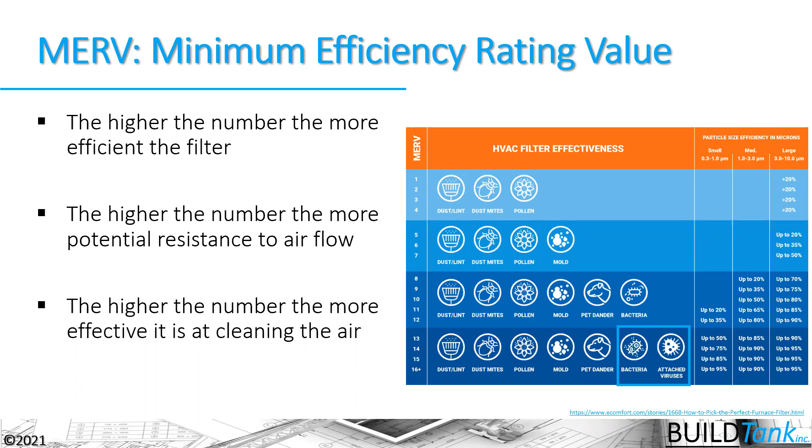You can see that from a 13 to 16 MERV filter, we're starting to get the ability to actually filter out viruses in our system. So you're going to see more people requesting better filtration in our houses, and therefore we need to design to make sure it doesn't impact the flow of air around our houses. What I'm talking about is what we call a pressure drop.

So we're comparing a 1-inch filter versus a 4-inch pleated filter. What we see is that a 1-inch filter has 2.7 square feet of area versus a 4-inch pleated filter, which has 8.5 square feet of filter area. The more square footage of area we have in the filter, the less the pressure drop across it, and the better flow we have.

So when you're looking at a 13 MERV filter, for example, you want to get the thickest and biggest filter that you can for your system. Same when you're designing your system—you want the thickest and biggest filter you can get so that you have the least amount of pressure drop.

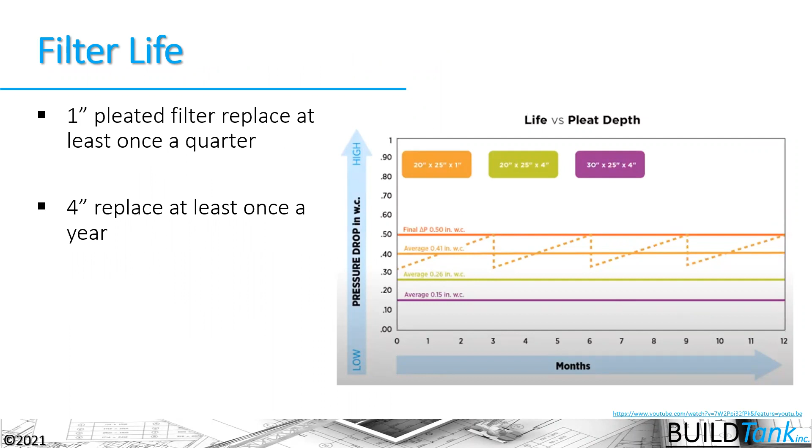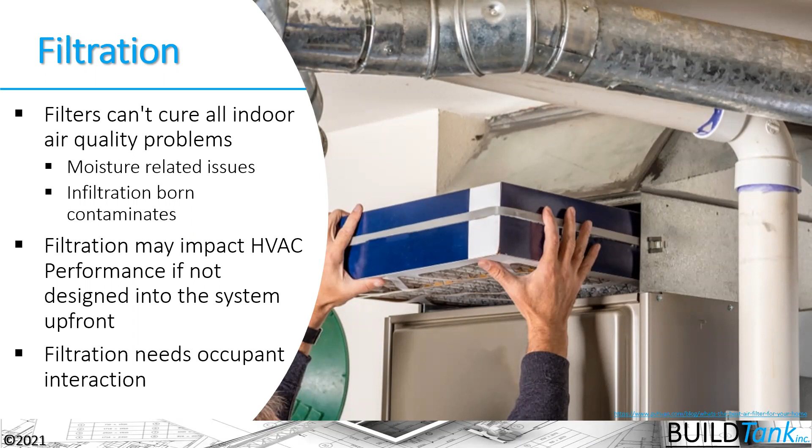Here's another way to look at it: a 1-inch pleated filter should be replaced at least once a quarter. Another advantage of the 4-inch pleated filter is that it can be replaced once a year. Now, I generally recommend that you replace your filter, even if it's a 4-inch pleated filter, more than once a year, because those higher quality filters are filtering more particles out of the air—they should clog faster, but again, you have more surface area. So I think changing that 4-inch pleated filter once a quarter is a good recommendation rather than once a year, but you'll see some manufacturers say you can do it once a year.

So to conclude here, what we have learned, I believe, is that sound building science and the mantra of building tight and ventilating right is truly embedded into the code. It allows us to do exhaust, supply, or balanced ventilation systems. We've learned that it's a climate-specific ventilation strategy—balanced ventilation systems can be used in any climate zone, but from a moisture perspective, we want to ensure we're not using supply and exhaust ventilation in climate zones where we shouldn't. We're trying ultimately to gain control and predictability of airflow, moisture flow, and thermal flow so that we can meet the core expectations people have of their houses and the energy efficiency requirements we're trying to meet in the code.